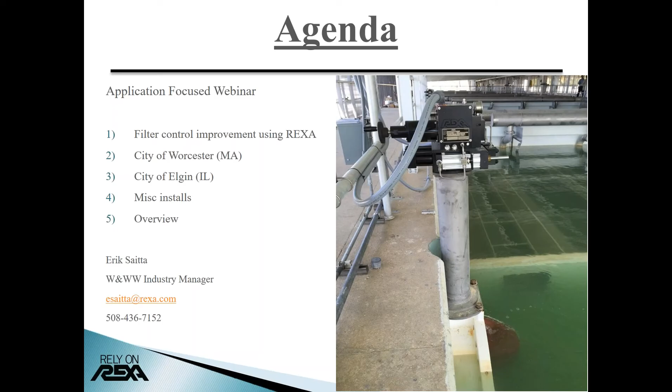Without further ado, let us transition into the city of Worcester. Now this is a traditional gravity-fed drinking water facility in Worcester, Massachusetts. It is a roughly 50 MGD facility with 8 gravity-fed filters that are using 24-inch butterfly valves to control and regulate the flow of water through their filtration system. And this is a picture of what the existing electromechanical actuator looked like on this filter effluent valve around 2011, before REXA did any work in the city of Worcester.

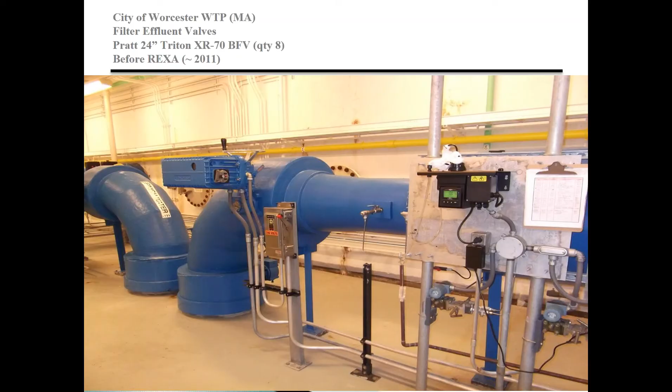The city of Worcester had always felt that they had some control issues in their filter system. And what they had noticed here is what is evident in this screen by the purple trends, where you are seeing this purple trend sort of hunting up and down around a target position. This was typical inside of the Worcester filtration plant, as is amongst many other filter plants within the United States, when using an electromechanical actuator to control a butterfly valve.

An electromechanical actuator is limited in how accurately it can position, how tightly it can control. Generally, you will see only about 2% resolution to control signal advertised, maybe 1% in some models, and that is directly right out of the box brand new before gear wear begins to degrade that resolution even further.

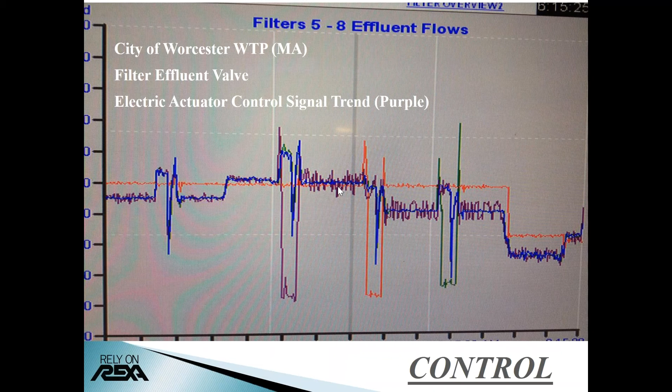And when you have this type of problem, what you will basically do is jostle the flow of water going through your filter media. So you are not getting your most efficient capture rate inside of your filter.

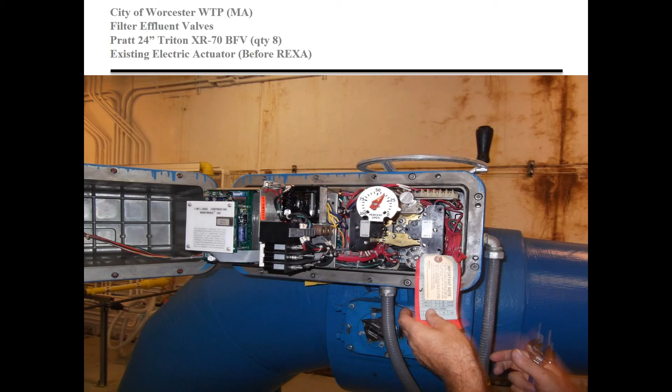Since Worcester recognized this problem, in addition to other problems, which were reliability with the existing electric actuators, here showing you the internals of this electric actuator where they had lots of board problems, limit switch issues, and general maintenance failures due to gear wear over time, the city of Worcester decided to try a REXA actuator out, given that we advertise much tighter control on a magnitude of 0.05% resolution for deadband accuracy, how tightly we can follow a control signal. We advertise that by simply retrofitting an electric actuator on a filter effluent valve in most drinking water filter facilities, we are confident we can prove a demonstrative performance benefit.

And so what the city of Worcester, Massachusetts did back around 2012 is they gave us an opportunity by giving us a purchase order that was conditional. They gave us a purchase order for the amount that a REXA would normally cost in this filter effluent valve, and the stipulation was that they had a certain period of time to try out the REXA. At the end of that period of time, if they did not feel that REXA performed well enough to demonstrate a performance improvement in the filter, we were willing to take back the REXA at no charge.

But if they felt that they saw a performance improvement, we were going to invoice them on terms that were favorable for them in their coming budget cycle. And so here you see the filter effluent valve that Rexa retrofit, and we will get into some more descriptive pictures later, and notice that it was plugged in with an extension cord because Rexa is a very low power, efficient energy consumption device. It only takes 115 VAC on just about all filter effluent or backwash valve installations.

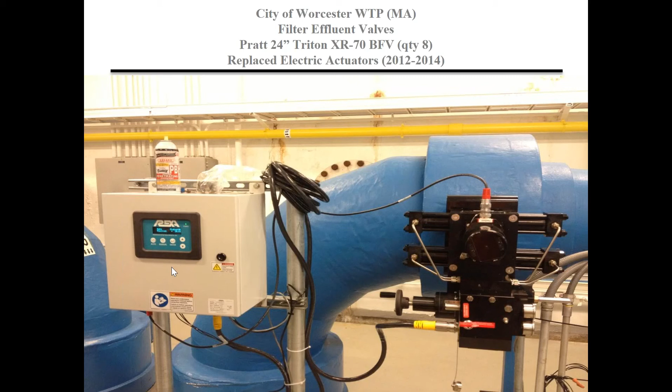Rexa comes as the muscle, which is the actuator on the valve, and the brains, which is the separate control enclosure, only connected by some electrical cables. And so this is what just about every typical Rexa installation will look like on a filter effluent valve. You bring your power and your control signal to the control enclosure, and Rexa provides the equipment and handles all the rest of the connections.

This is the after trend with the Rexa. The first immediate takeaway was that the turbidity spikes after backwashing were much less than they were before. Going back and forth here, they were spiking around 0.3. Now the Rexas were spiking on average around 0.1 on turbidity. And they were settling out a lot quicker after the backwash cycle, coming back down to steady state operation.

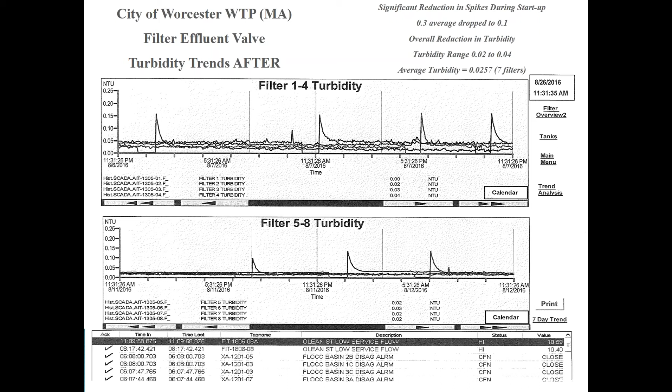But once they saw the improvement of Rexa in these trends, they were inspired to improve the control logics within the plant. Now that they had confidence in the positioning capabilities of Rexa, Worcester could now set their filter effluent valves to open to only about 25% after a backwash, approximating normal filter flow. As a result, instead of the huge turbidity spikes that Worcester would experience when the filters came back online, up to around 0.3 as mentioned before, Worcester now saw a significant reduction in turbidity down to about 0.1, along with a reduction in the filter to waste time as well.

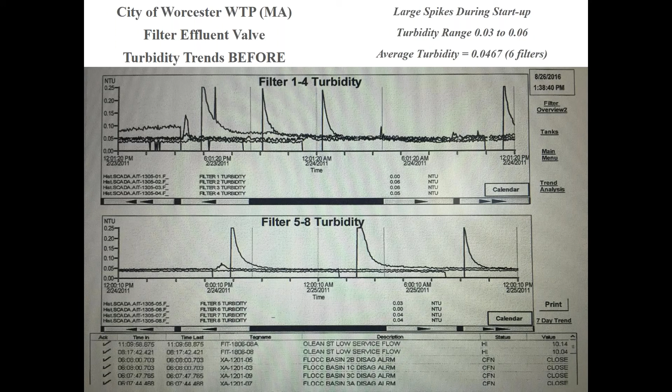In addition, all of the chemical feeds in the Worcester plant were based off of flows, and so by tightening up the filter effluent flow, they were also tightening up the chemical dosing, which resulted in dollars saved by the City of Worcester on chemical dosing. So overall, there was a tremendous performance improvement that the City of Worcester felt just by retrofitting their existing actuators, which led them to retrofit the remaining 7 filter effluent valves with Rexa actuators, so that now all 8 filters within the City of Worcester, including the backwash valve, were retrofit with Rexa as the result of one trial unit.

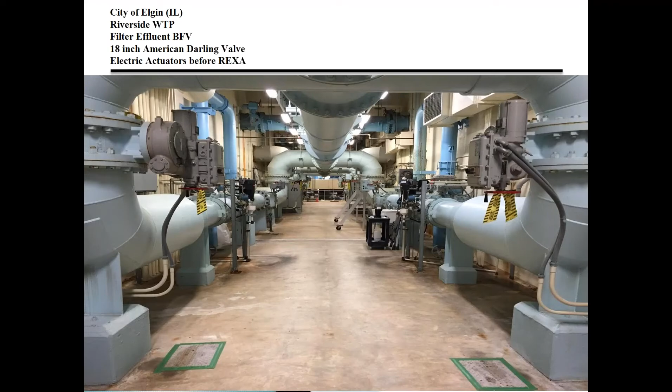So, as a result of that, we then used the City of Worcester as a reference for use in the City of Elgin. And the plant manager for the City of Worcester, who anyone listening is welcome to be referenced to on behalf of Rexa, wrote an email to the City of Elgin detailing all of these performance benefits and also talking about how our backwash valve actuator helped them improve the swings that they were experiencing before with their existing electric actuators. Their backwash valve actuator was much more precise with Rexa than the previous electric actuator, and the backwash flow quickly went to the low wash rate as opposed to before when they had wild swings from the old electric actuator.

Having the backwash flow do exactly what they wanted also allowed them to better optimize their backwash sequencing, improving efficiency. This reference that City of Worcester gave to Elgin allowed the City of Elgin to start exploring doing a similar trial unit here in their filter gallery, where they had existing electric actuators on a lot older American Darling valves, 18-inch butterfly valves, that they felt, in addition to being old and maintenance intensive, were also not controlling their filters as accurately and efficiently as they would like.

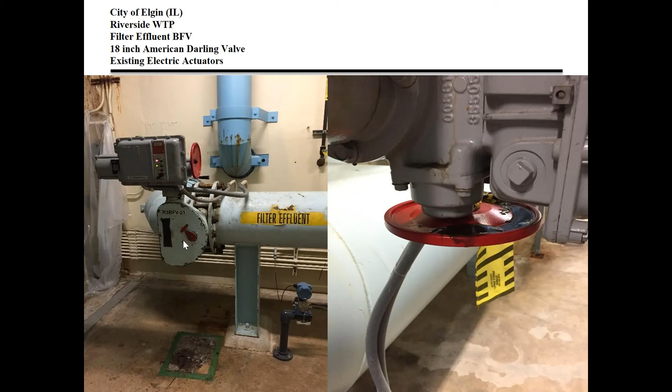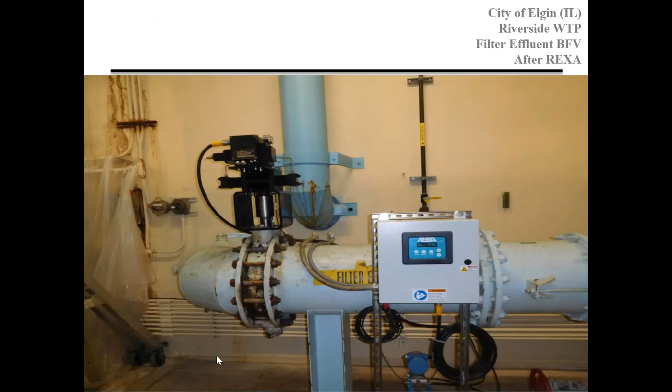Here you'll see a shot of one of the existing electric actuators and all the grease that would commonly leak out of this electric actuator on the ground, so much so that the plant would regularly in the past put catch pads underneath the electric actuators that they eventually gave up on. Rexa did a similar trial retrofit for the City of Elgin, as shown here in this slide, replacing one of the existing electric actuators. And then we also were told of some demonstrative benefits in the efficiency of the filter.

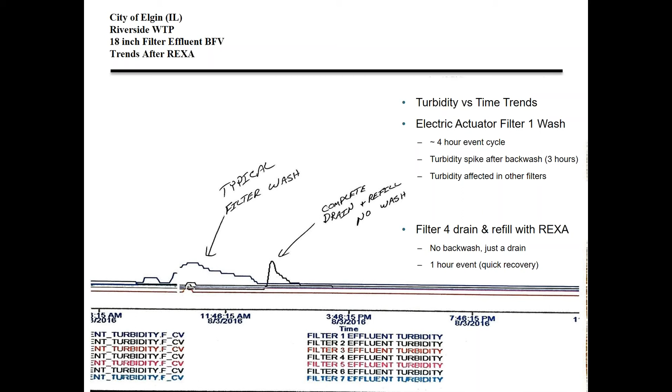And this slide also shows that once Rexa was retrofit to filter 4, they had an event where they completely drained and refilled the filter for another reason. It wasn't a backwash. And you can see that while there was a high turbidity spike at that event, the recovery to get back was very, very fast. And so the performance of Rexa was demonstrated out here by the fact that it had a quick recovery in getting turbidity back to where it needed to be after a backwash. And that has led the city of Elgin to move forward with looking to use Rexa on more filter effluent valves and other applications in their plant.

Both of these references, Elgin and Worcester, as well as other ones we are about to show here, are more than willing to talk to any prospective customers or consulting engineers who are considering Rexa to be used on a pending or existing project to help improve control of the filters and ensure proper efficiency.

That is what Rexa typically expects from an actuator on this type of service, is a minimal average maintenance-free cycle of about 10 years of service without ever needing to be touched. Every Rexa on a filter effluent or backwash valve service will come with a full 5-year product warranty out of the box, demonstrating how confident we are in the ability of Rexa to perform for such a long time without burdening the maintenance staff or budgets for longer periods than plants are used to.

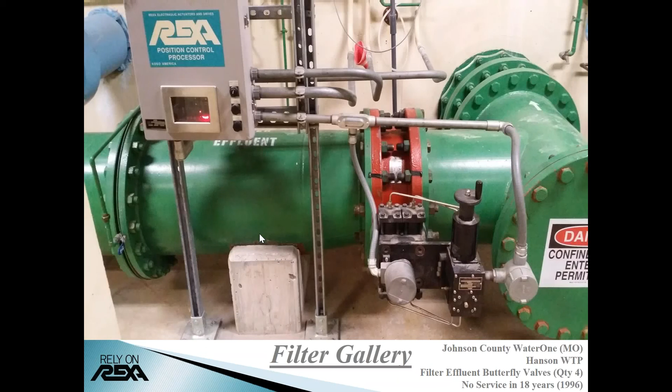This is another example of an installation here from Johnson County out in Missouri at the Hanson water treatment plant, where 4 Rexas were installed on modulating filter effluent valves back in 1996. And all of them performed flawlessly for 18 years without ever being touched, until about a winter ago, where this particular unit required 4 hours of downtime and a $200 or $300 rebuild kit. That was the first amount of time and dollars for these 4 actuators that were spent in 18 years of service, which is one of the many reasons why Johnson County has standardized on Rexa throughout their drinking water operation, with somewhere between 50 and 75 Rexas installed in that facility at last count.

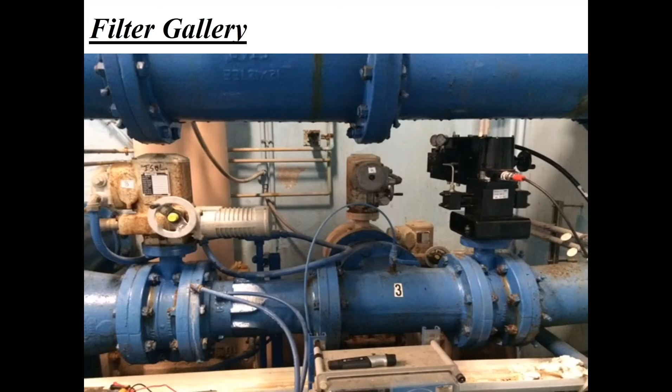Most customers, once they start installing Rexa to solve a headache, will standardize on Rexa for all critical valve or gate applications within their drinking water operation to eliminate headaches, cost of ownership, and downtime. So here are some recent slides showing some installations that Rexa has done.

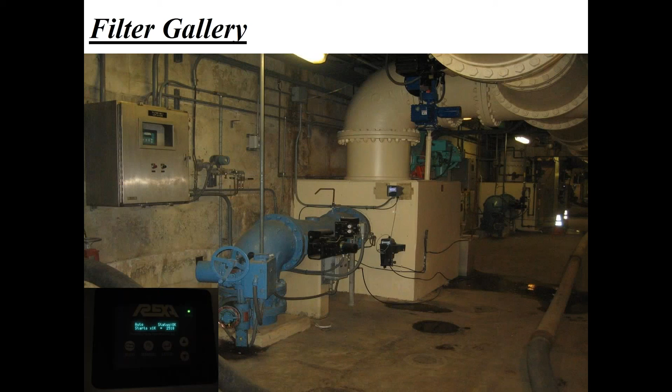This particular installation on the East Coast shows how a poor control signal inside of this plant SCADA system was causing a Rexa to do 2.5 million position changes to hunt over a 1.5 year period of time, which is the equivalent of about a 20 to 25 year duty cycle in 1.5 years, because the power wires were wrapped in the same conduit as the control signal wires, and the Rexa was picking up induced noise on the control signal and interpreting them as control signal changes.

But the Rexa, because it is so robust and able to withstand very difficult duty cycles, was able to operate flawlessly, and still, about 7 years later, continues to operate on these filter effluent valves despite withstanding such high duty cycles because of the design capabilities of what Rexa was built to handle. So we do a lot of filter effluent valves and a lot of backwash valves.

Here in this particular plant, there are 16 filters in the background, all of which are tied to this common backwash valve shown overhead, controlled by a Rexa. If this Rexa fails to perform for any reason at all, it will shut down all 16 of the filters attached to this line for a period of time until the Rexa is back online and able to backwash, depending on the backwash frequency of this plant. There are 4 of these Rexas controlling 64 filters in this particular plant, with a flawless track record over the last 10 years. We also have the capability to offer a fail-safe.

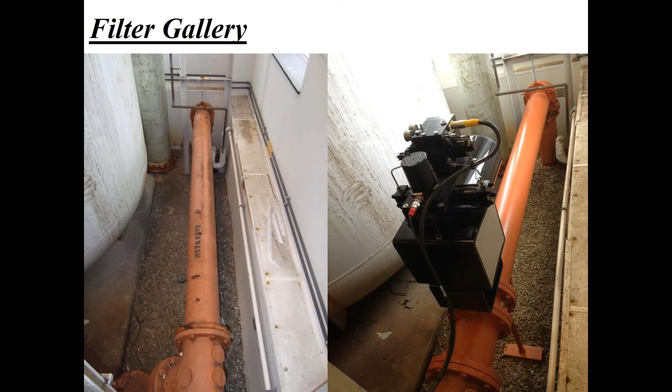Here is shown a Rexa that was retrofit on a backwash valve to provide a mechanical fail-safe on this backwash line; in case a power outage occurred, this Rexa will automatically close this valve in a controlled manner. Finally, here is a design capability that Rexa also can offer, showing a backwash valve we did, where the valve was located about 20 to 30 feet above ground and required catwalks and staging to get access to.

Rexa is able to separate two of its components, putting the cylinder that controls the motion of the valve up in the air and remote mounting our power module next to our control enclosure, so that if an end user has a shutdown or an electrical issue for any reason and still needs to manually move our actuator, here they can do so using our manual override and a cordless drill. This allows end user accessibility to the Rexa at all times and eliminates the need for setting up staging, ladders, fall hazard equipment, etc. that can become burdensome and time-consuming to plant maintenance staffs. We are able to design custom solutions that make things very end-user friendly with this product.

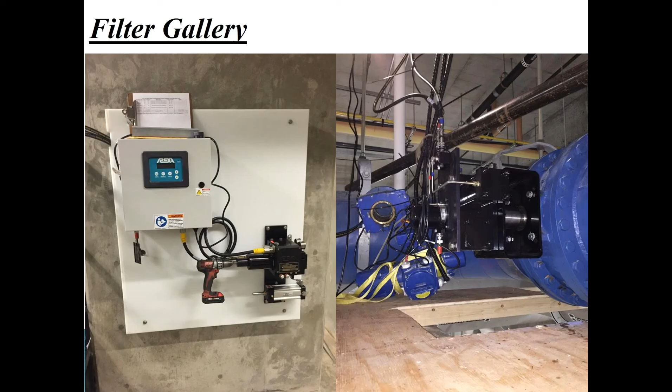So in closing, with this presentation and webinar here today, we wanted to point out the main things that Rexa can do potentially for any drinking water operation with a traditional filtration system. And granted, every plant is different, and we're not advertising that we can do this for everybody, but in our history, when given an opportunity, we have shown a remarkable record to yield performance improvements, and these benefits, as shown here, by retrofits or with consulting engineers on new project construction.

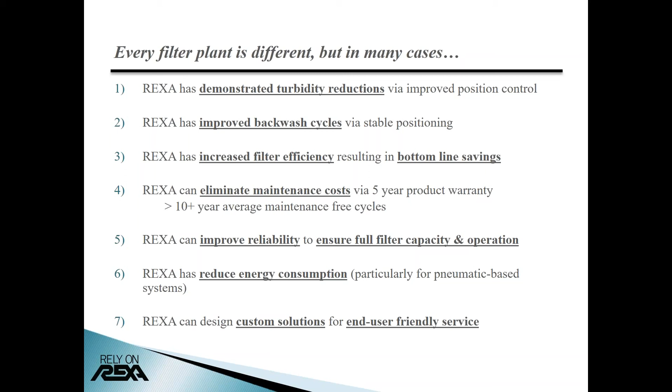And so in either case, these are the types of benefits, improvements, and value messages that Rexa, over the years, and more so now with our targeted approach to this application, have been proving out to end users for drinking water filter operation. And we would be happy to discuss any of these benefits with you as a potential customer or you as a consulting engineer for any retrofits of existing plants or any new project construction where the control, efficiency, reliability, low maintenance, and end-user friendly benefits demonstrated here by Rexa would prove to be worth it for both a consulting engineer in design or an end user in the field.